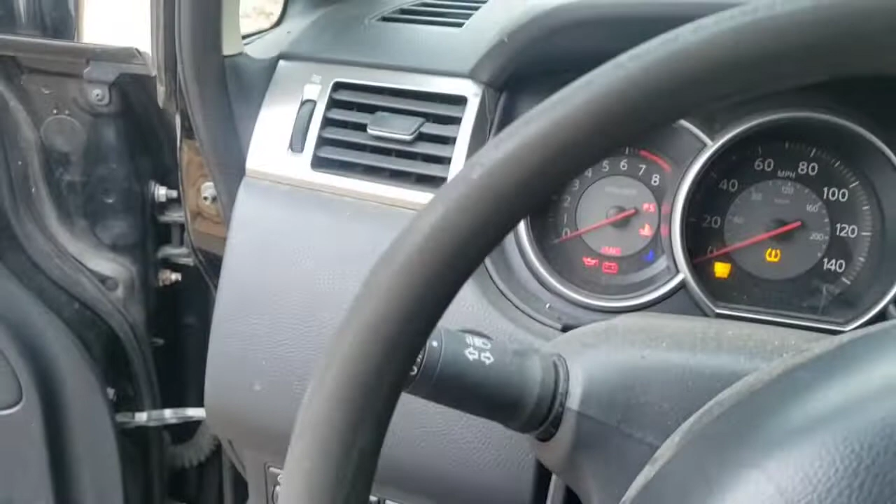Yes, so let that mug warm up a little bit. Boom. So we got that going.

But we got this mug, and I need to get this thing started ASAP though. But I'm about to try to move that a little bit up so I could just fit the bourbon through here real quick. The bourbon, it says hi. Bourbon says hi.

But yeah, I'm gonna try to fit all these rims on, but I gotta find a socket for it. So that's that. I'm gonna move these cars and then I'm gonna be back. But we are installing some parts, that's under there, this little box. So yes sir, stay tuned.

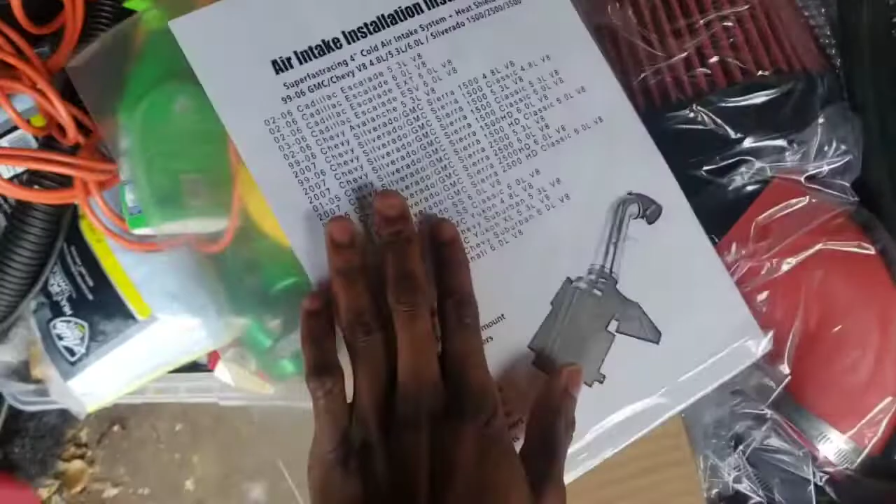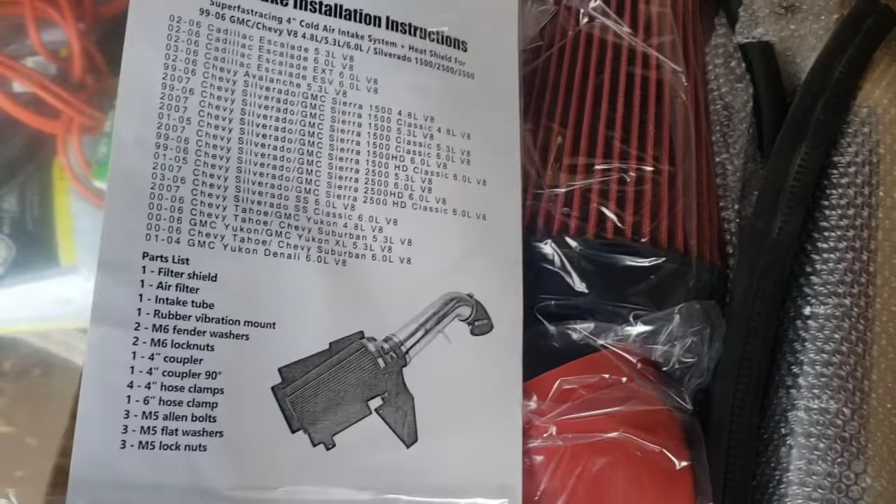Alright y'all, so it does come with intake instructions. I'm gonna go through that and look at it with you guys, because I don't know how many people have installed intakes on these trucks on YouTube and shown the video. This intake was only $60, and it actually had 1,000 views and reviews that were pretty decent. I could probably put the picture or link down in the description, I'll do both.

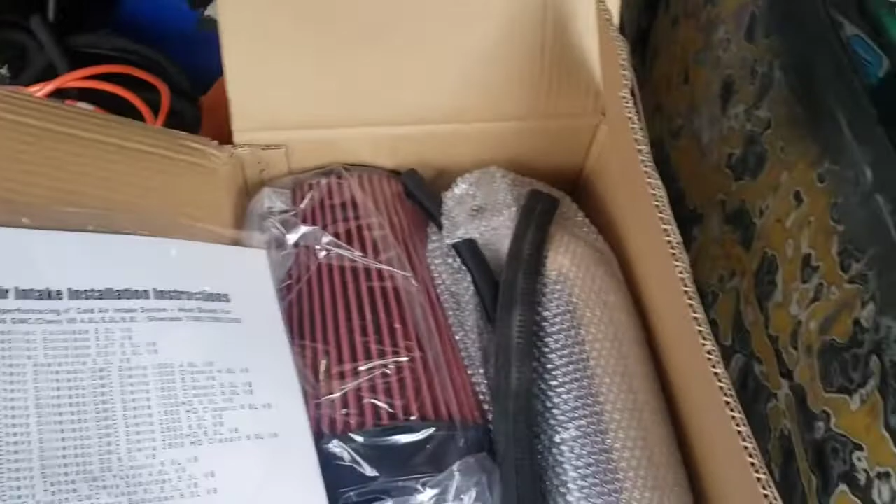I'm ashy as fuck, anyways, but this was dead ass a $60 thing. I'll put the price right there, you should be looking at it as I'm speaking right now. So it comes with instructions, did not know that, this is the first $60 Amazon intake. If you look at my Honda one, and I think my Infiniti, I don't think they came with much instructions. This one actually came with a heat shield and everything.

So literally, I just cut it open. Comes with these couplers, or however you call it, and little bolts and stuff inside. Fat ass intake, bro, my hand is huge, trust me my hand is big, this motherfucker is huge, it's because that truck is huge really. It's a 4-inch hole for the intake, and the heat shield, metal heat shields, all right there. So that shit's crazy, bro, all for 60 bucks, oh shit.

So if you have a Suburban and you're thinking about getting this kit, I'm about to put it on, and I'm literally about to do before and after. So just stay tuned, I'm about to just do it right now. Yeah, about to pull this bitch up, move this motherfucker.

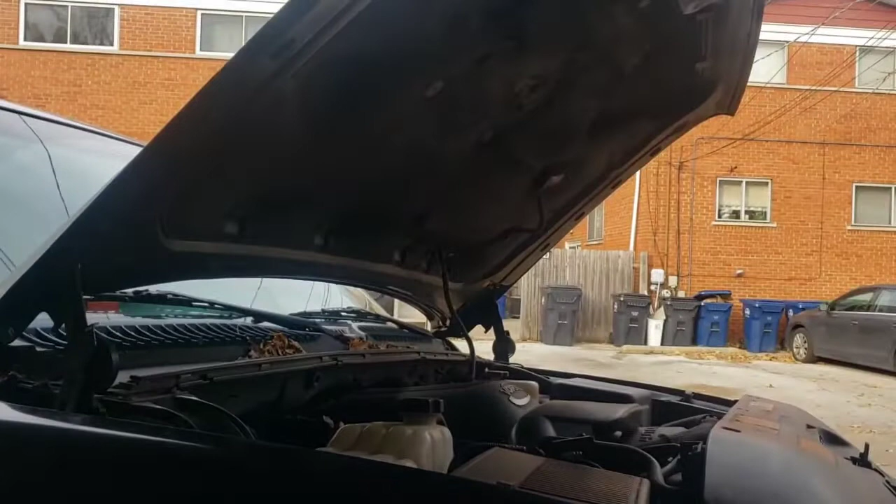Alright, we at the cockpit, cockpit to the front. Oh my goodness. And it's intake right here. So we do also have new lights for the back, even though I crashed this bitch, but it's alright. I'm about to put this right here. I think that should be good enough. Hopefully y'all can hear the intakes, I'm pretty sure y'all will be able to. Intake right here.

I ain't want to do too much.

I'm pretty sure I just get it off from this clamp, before the sensor, and then I might have to take off that whole thing because the sensor definitely has to come off. Hold on, there's instructions, alright?

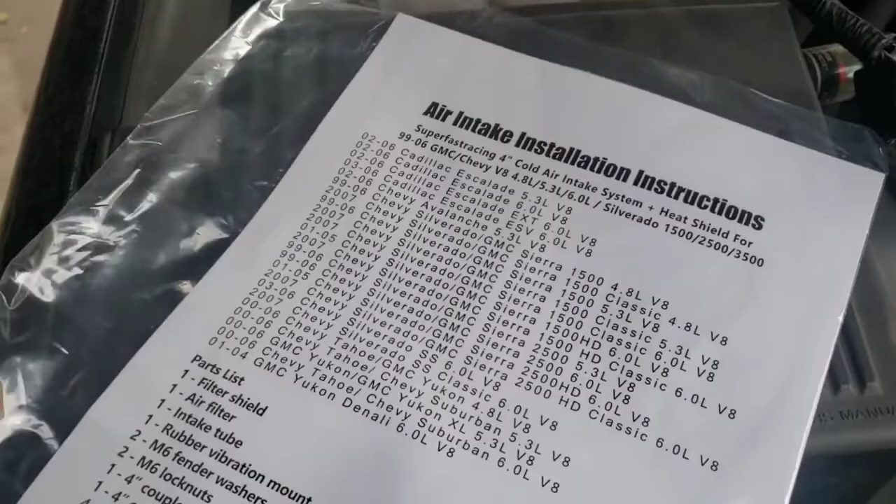I'm gonna read these first and go through them with y'all. Things first. Rest in peace, Uncle Phil. For real, come on bro, oh I just ripped them. Alright, y'all got some ripped instructions now, bro. But anyways, look, it's just papers. Alright bro, turn this around.

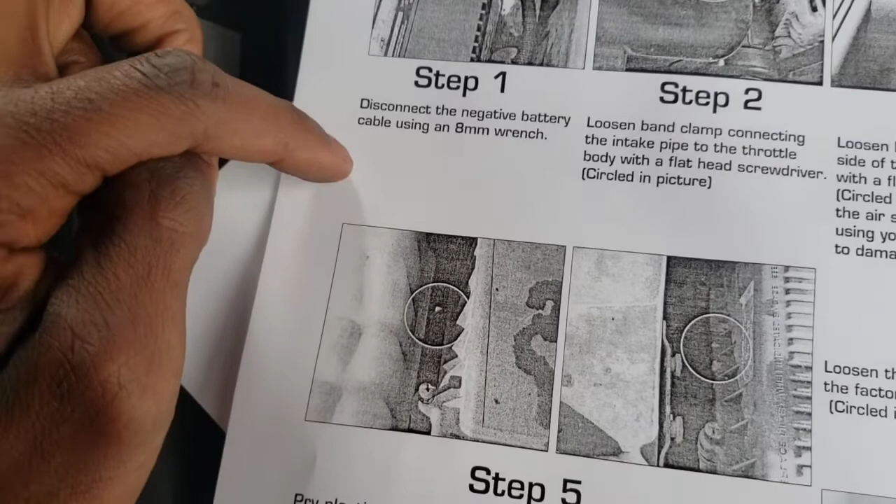Why is it starting at step 7, bro? Watch out. Alright, disconnect the negative battery. Loosen the band clamp connecting the intake pipe to the throttle body. So that would be in that location, right here. Okay.

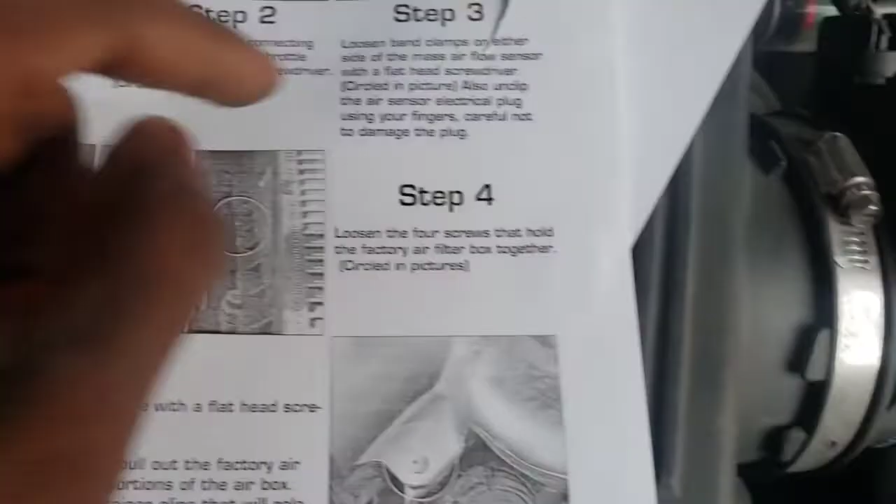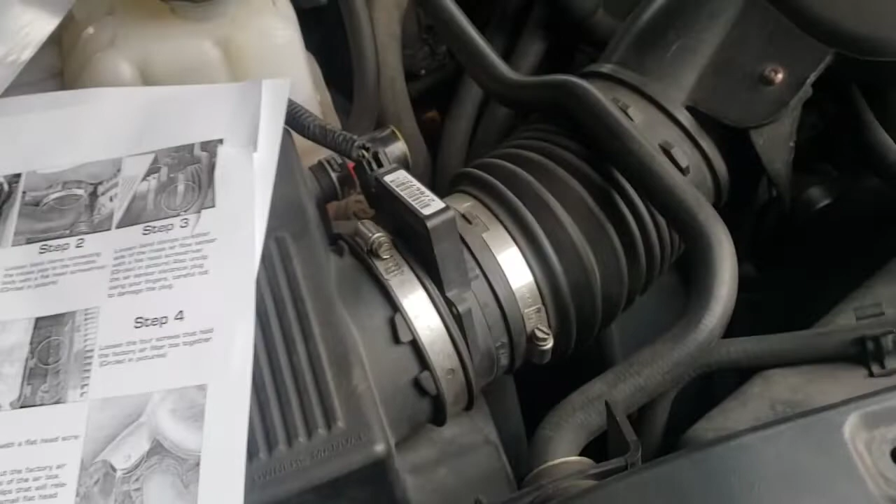Wait, what? Alright, loosen the screws that hold the factory air filter box together. So that's these screws right here, 1, 2, 3, 4. I'm gonna just go through it and do it. It seems pretty simple - take this apart and then put the new thing in.

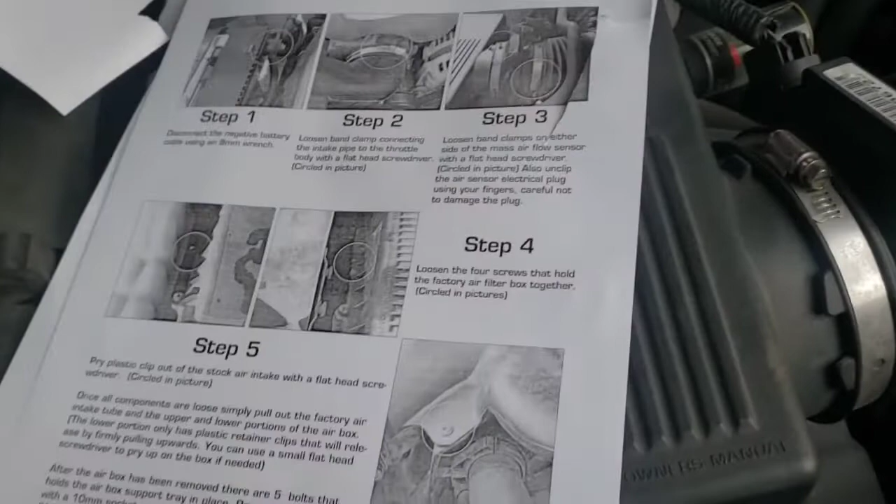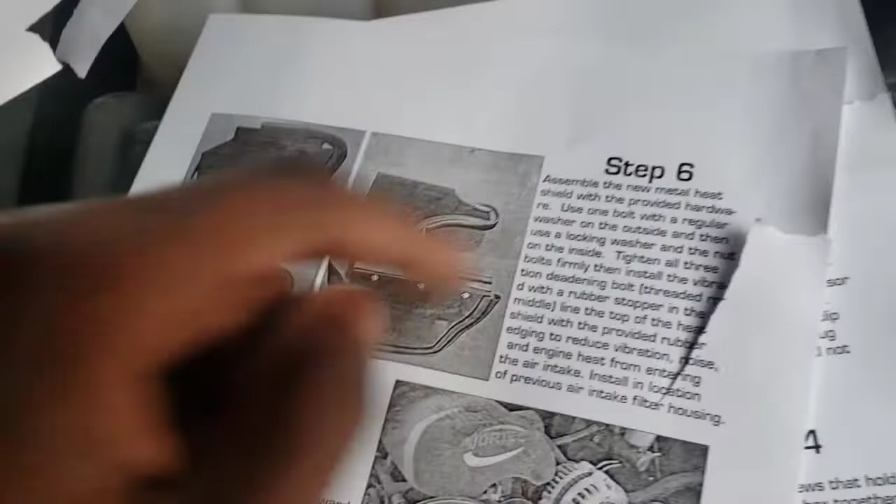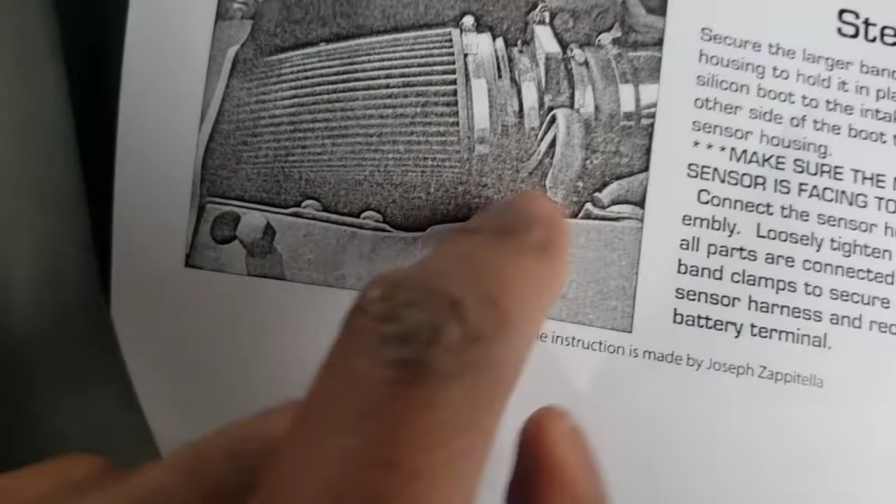I'm trying to see where they want you to put it. Yeah, assemble the new one - put that together, the heat thing, and it should just go in there. Then it says put the new airflow sensor. That's all I thought we had to do anyways, so it's decent and doesn't run a code. Then that goes straight there, bro. It doesn't look that hard. It just looks like you take everything off, take off these 2, and then replace everything. Pretty simple, bro, pretty simple.

That's what I figured anyways, but it's always good to show you guys everything that it comes with and all that. So that's good.

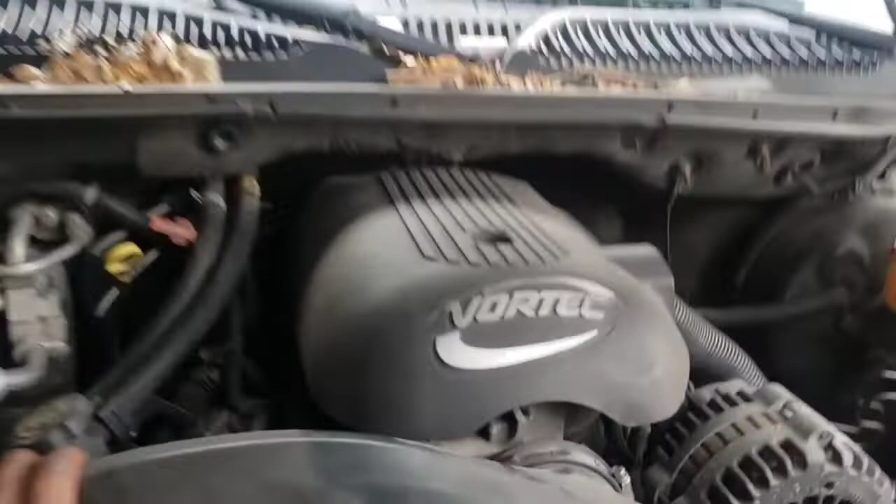Let me see, right here, that's not a good spot. Alright, I'm trying to get a decent spot for you guys to see this. I want y'all to see this in action, and I ain't got nobody holding the phone right now. But I promise, man, hold on, I can probably do this one-handed. I might do this one-handed. Another one-handed video, y'all ready? Hold on, give me like 2 seconds.

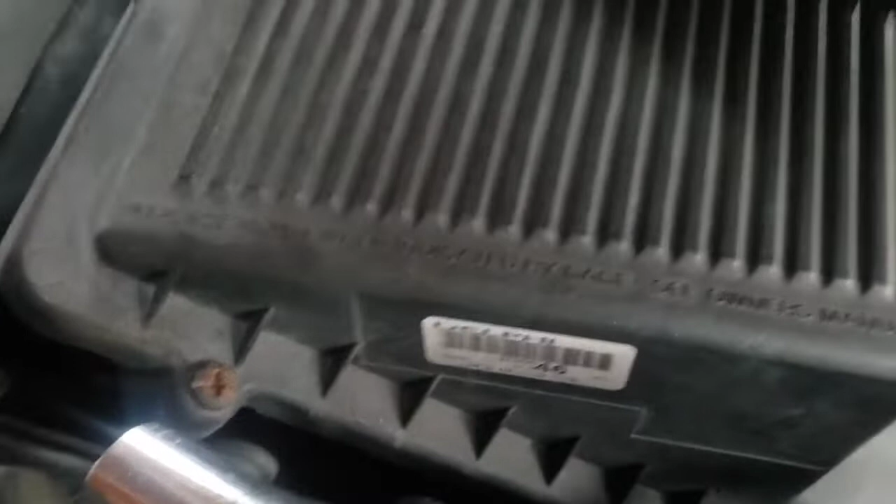Alright y'all, so I loosened it. I don't know, these ain't gonna just pop off. Or where are you supposed to start taking it off at? Oh, there it is. Does it start? Alright, we gotta see where this pops out at.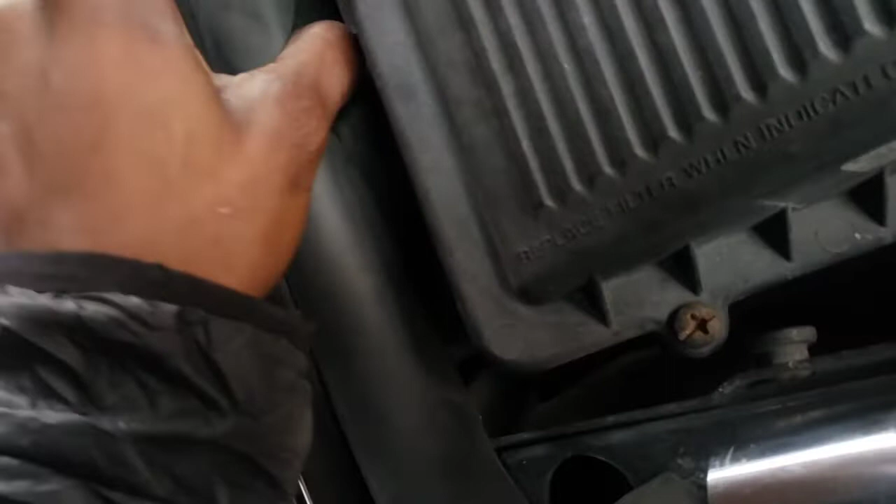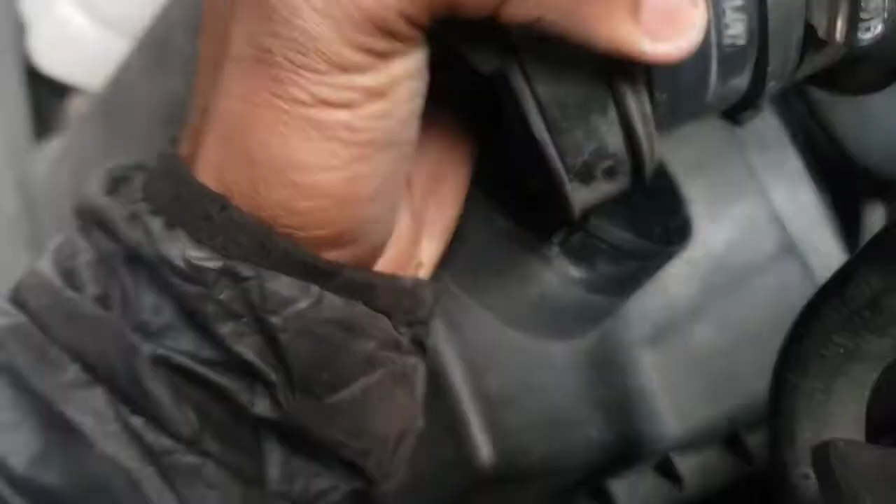I think you're supposed to unscrew the bottom, but I felt like this just popped out. I think what's holding it is this back right here. Let's see if I can finish getting out the sensor real quick. Alright y'all, I'm about to just kill this with 2 hands real quick, and then put it right here and time lapse it for y'all, because this shouldn't be difficult.

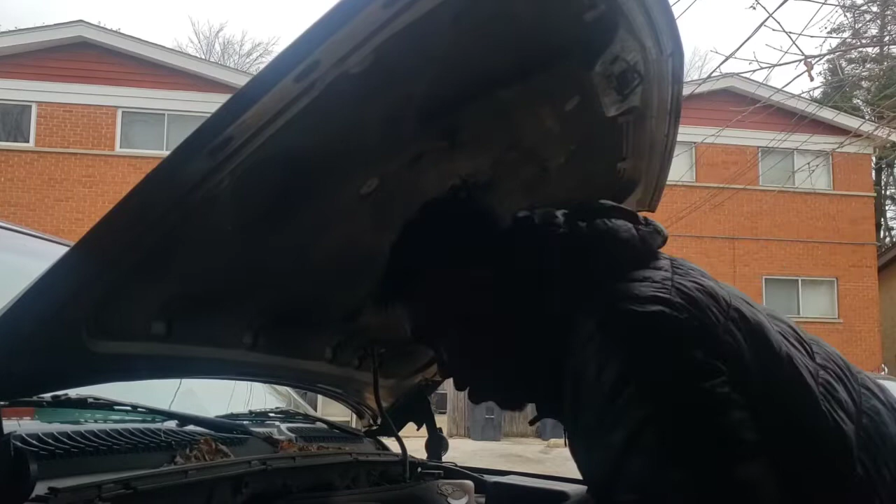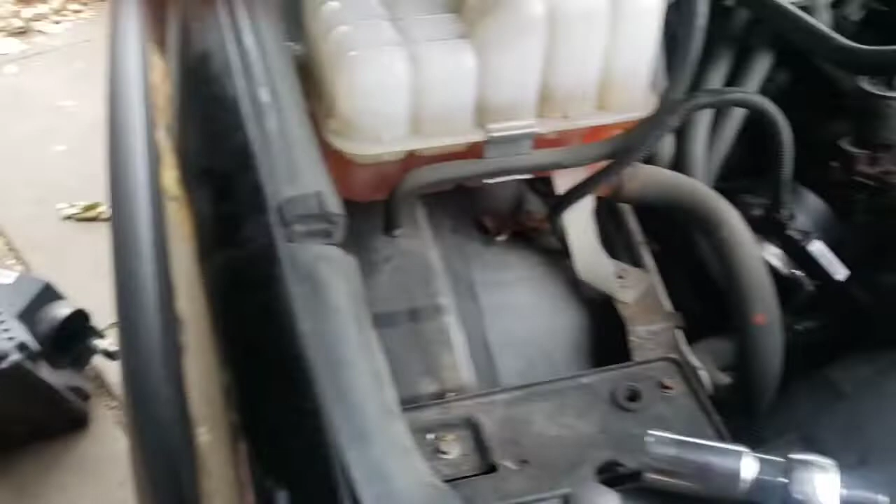So I got that out. I still don't know about this. I figured all this shit just pulled out, bro. Yeah, it's just 2 things on the bottom. Work that out, what they were talking about. At this point, all my stuff is still in and together. I'm trying to see - so this whole area is open now.

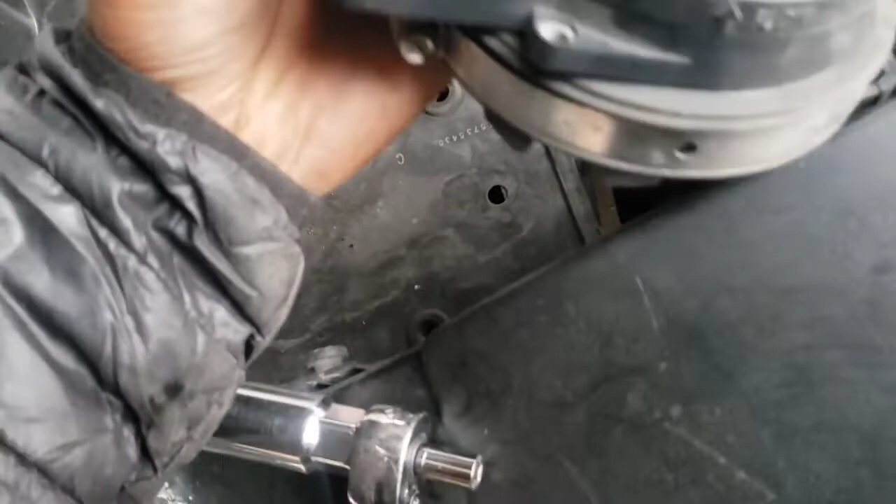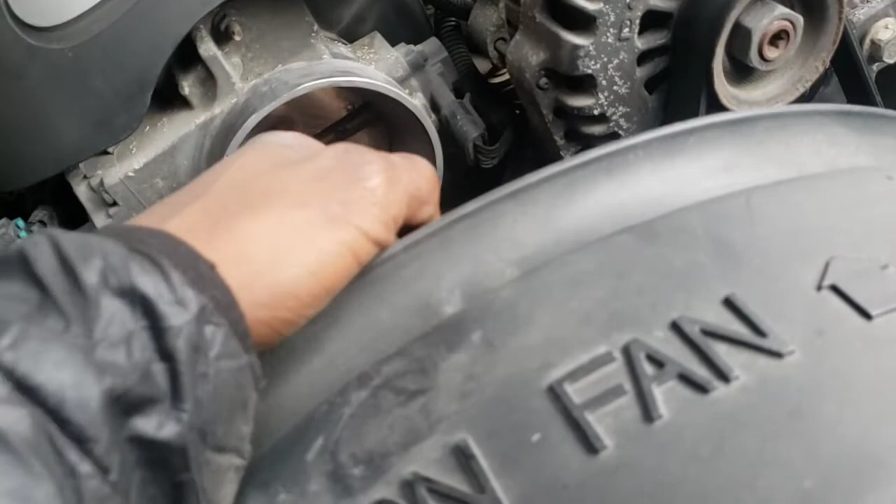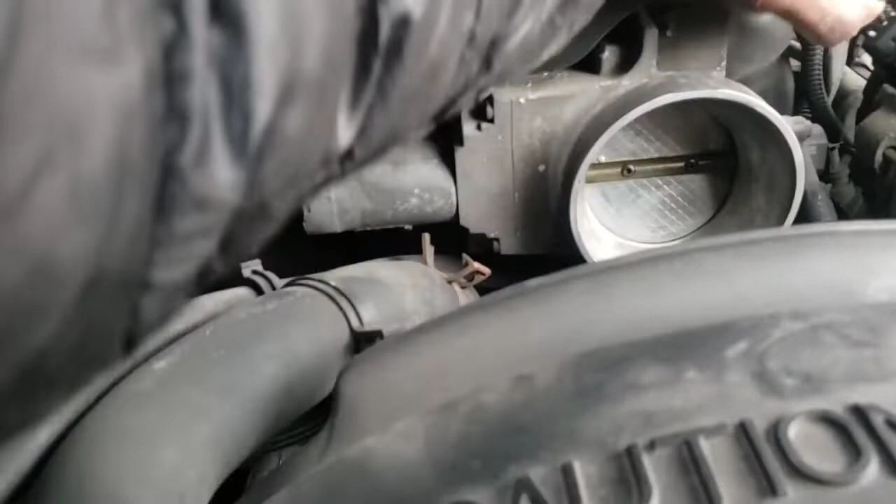My sensor is off and intact, so that has to go back, right? And then here is my throttle body, checking if it's hot, only cause I would like to clean it a little bit. Other than that, I've never really - I did obviously the spark plugs on this, and now I'm about to do this intake.

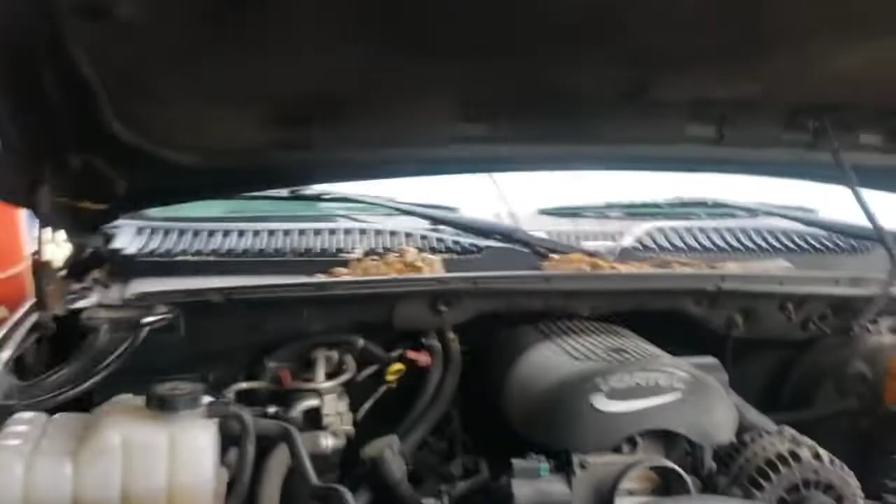So yeah, let me clean the throttle area, and then I'm gonna get everything together so I can shove everything together and in. So stay tuned for that. This shouldn't have been that long, and I could just cut this all out in time lapse, whatever I need to, but I will be back.

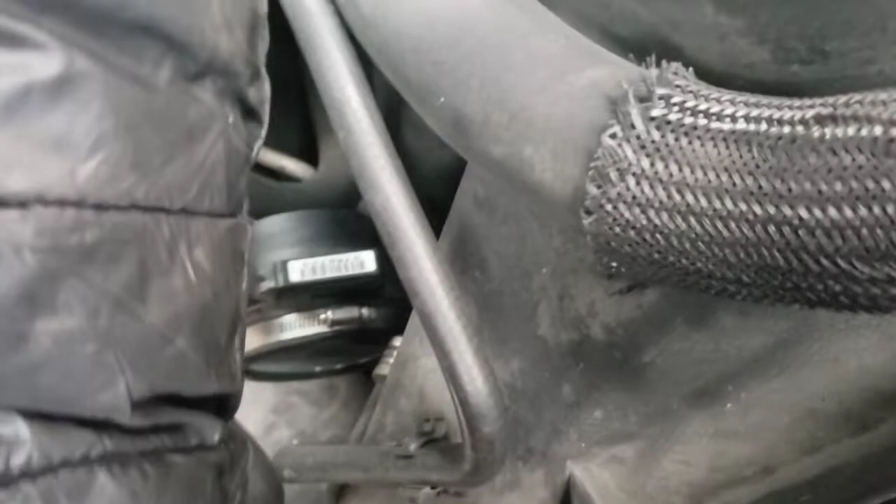Alright, what I'm doing right now, I'm matching parts right now. So this clamp is the first thing that goes on.

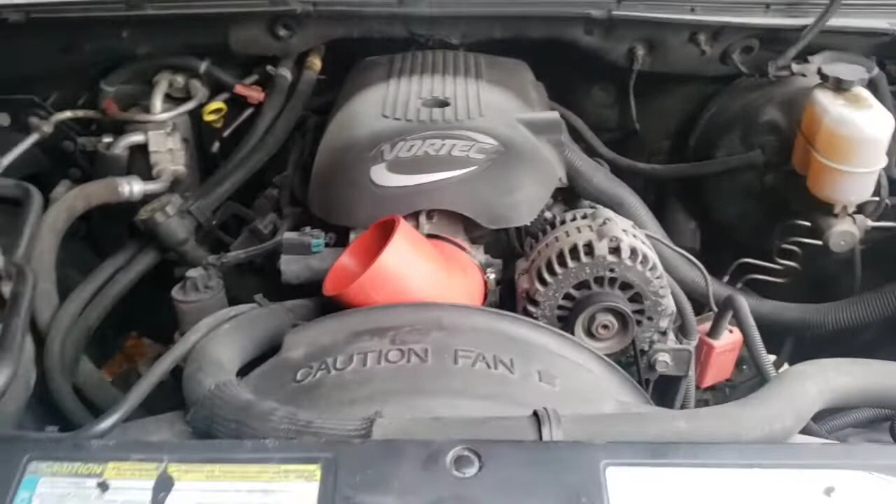That looks good as it is right now. It looks really good being red. I should have done a before and after picture, but I could probably find a normal Vortec engine from a Chevy pictured online and compare it.

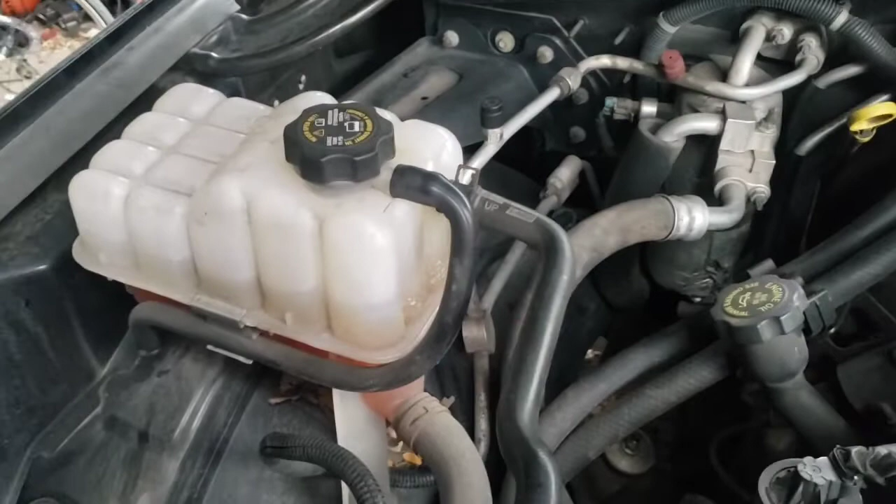I also recorded before, but like I said, I'm just trying to get everything in and make sure I have a clamp for everything. This big ass, you dig? I'm gonna make sure all my screws are faced towards me. After that, I'll be putting the pipe in, and it goes under this, and then it goes in there.

If I can do this one by hand, if I can't, I'm gonna just put this down later. I'll put it down, and then after that it's this clamp.

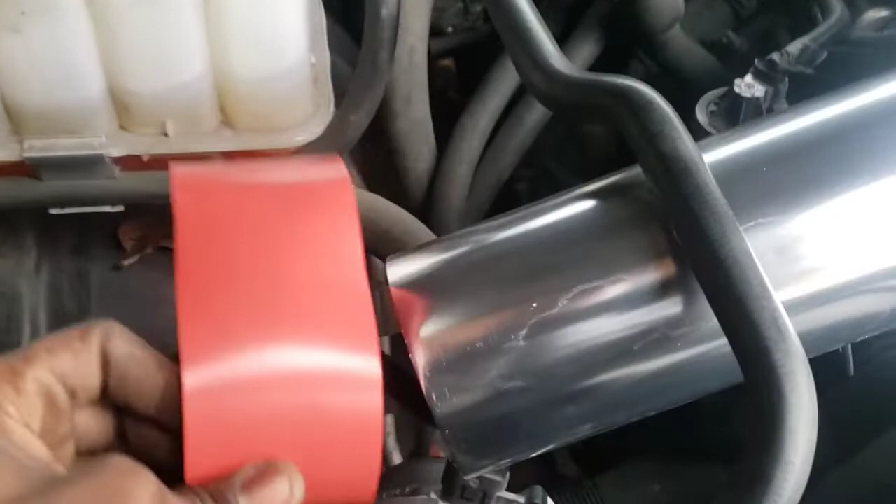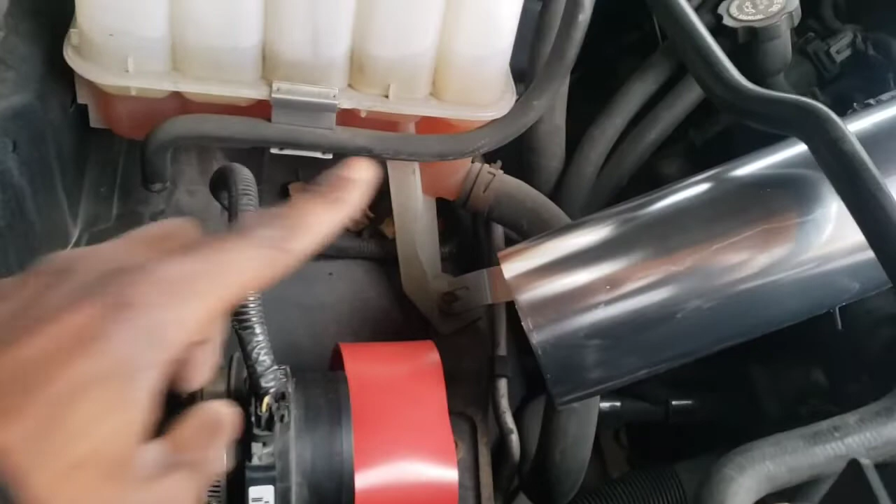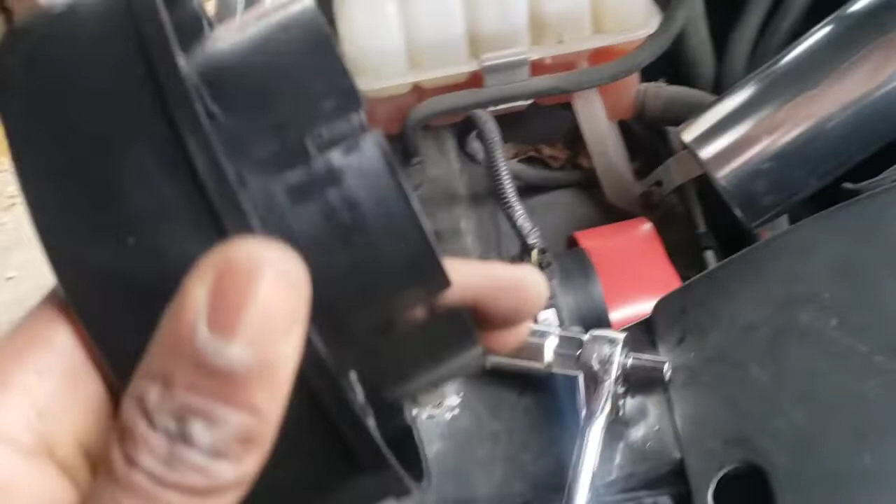I just want to show you guys what I'm gonna be doing. After that it's this red clamp. Then this red clamp goes to this sensor. This sensor goes to, I'm pretty sure, the intake. The intake has this little thingy, and it goes around there, and then there's another clamp for this and the intake.

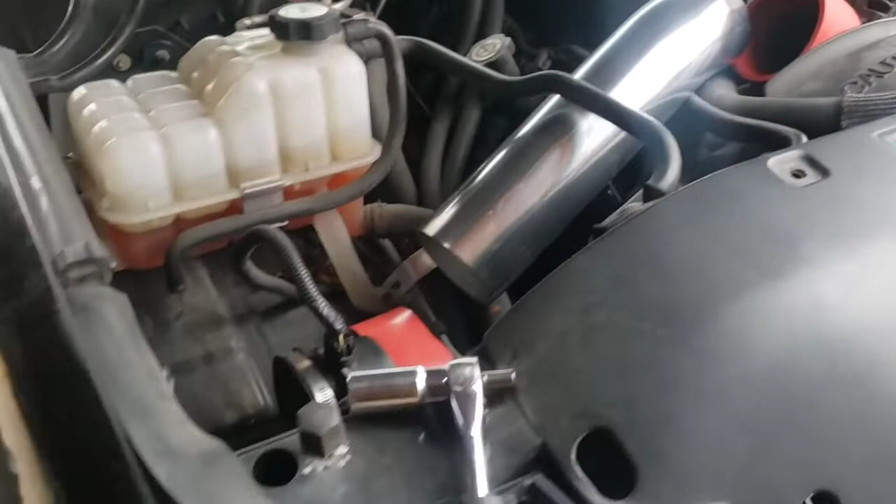It's really not that difficult, so I'm gonna just show you guys after it's done. I literally just went through it twice with the instructions, and it's not that hard. I'm gonna go through it and then show you guys the results. So stay tuned. Alright, so far I have these in right now.

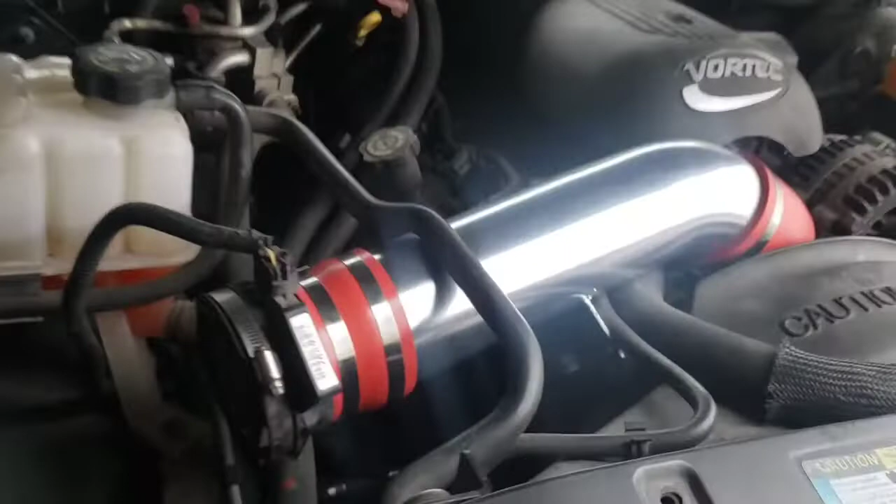It's not even snug in, and you can tell where the intake's gonna go. Right now I have to make the heat shield, so it's just three screws that go up together, and I'll show you guys after that. I really hope you guys get how to do this. It's really not that hard.

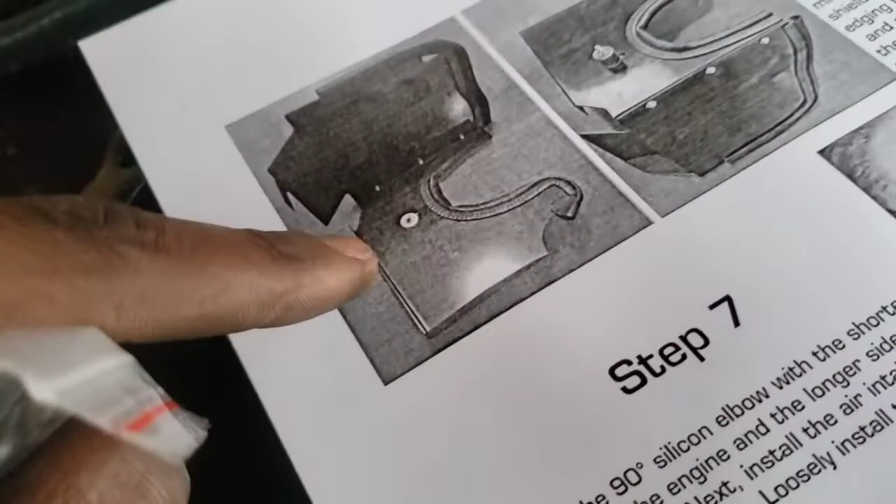You basically have to put the 6 screws in, or 3 screws, or whatever, nuts and bolts. So I'm about to do all that and I'll be right back. After that I'll get ready to start putting the actual holes in there, because you have to put something in the bottom, and then the three things.

Alright, I'm trying to show y'all the rest of this. I'm taking this out because I think this is the spot where the little piece is supposed to go, to the bottom of the thing. We're about to see right now. It's about the same length, so I think this is supposed to take that spot.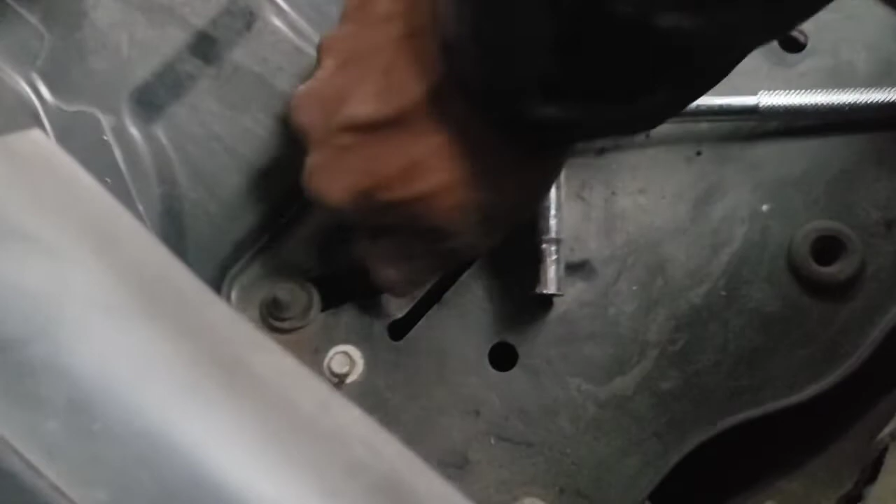If I can get it to catch. Yes sir, right. So you guys get to see most of the end of me installing this intake. You want to put this little thingy in there. I just took out that little bolt.

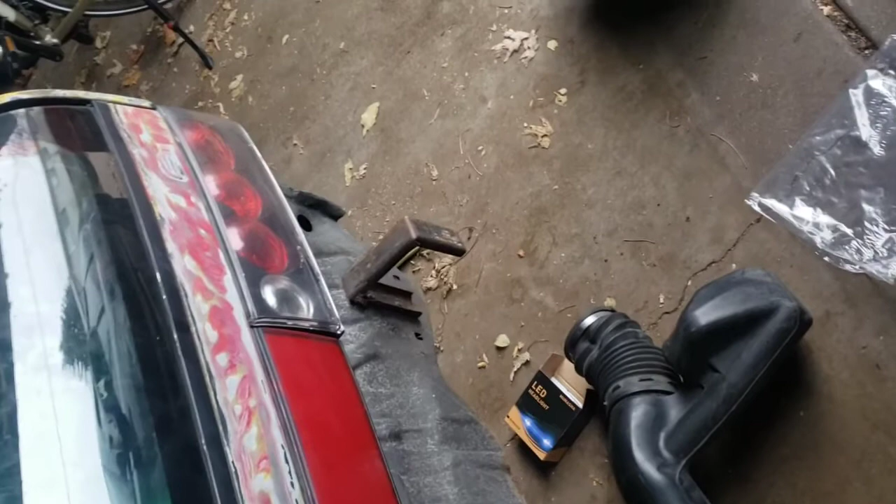Okay, so you take that and put your washers in. You put one washer down, and then you put this thing in there, and hopefully it fits, you feel me? Alright, we got it down, kinda.

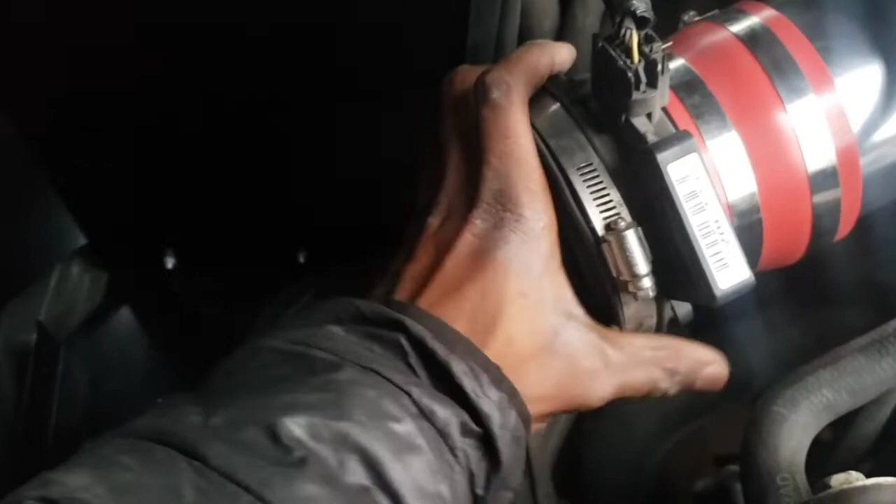This part's fucking with me a little bit, but look at that. Yeah, there we go. Right now I'm about to just put the other washer in, and then I'm gonna clamp it all down.

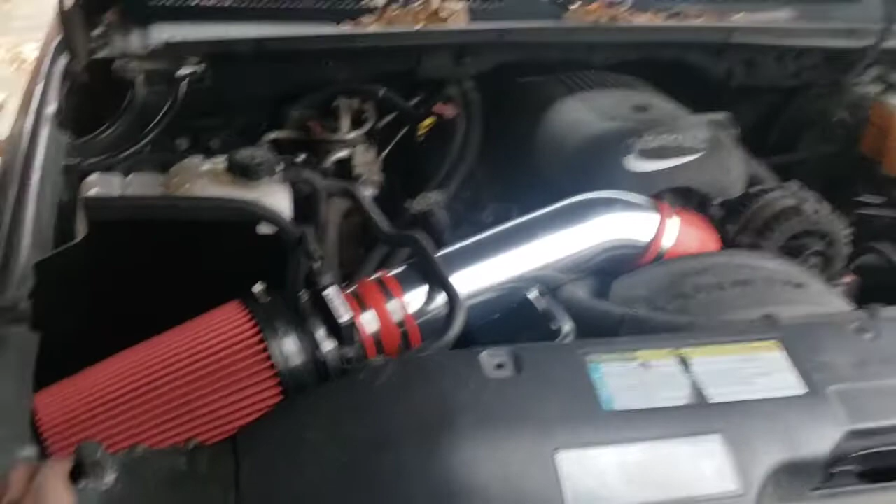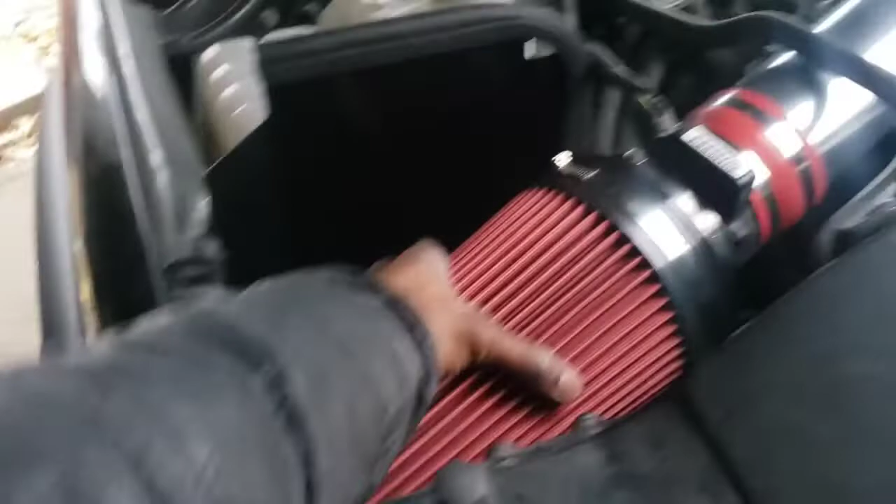Alright, this will probably be my little thumbnail, I'll get it for y'all. Man, this is all sturdy in there, sensors in there, everything is in there. I don't have any parts left except these little extra screws, I think, but everything is in there. So let's get y'all a little start up, I might have to cut it.

Definitely sounds better. I don't want to go too crazy.